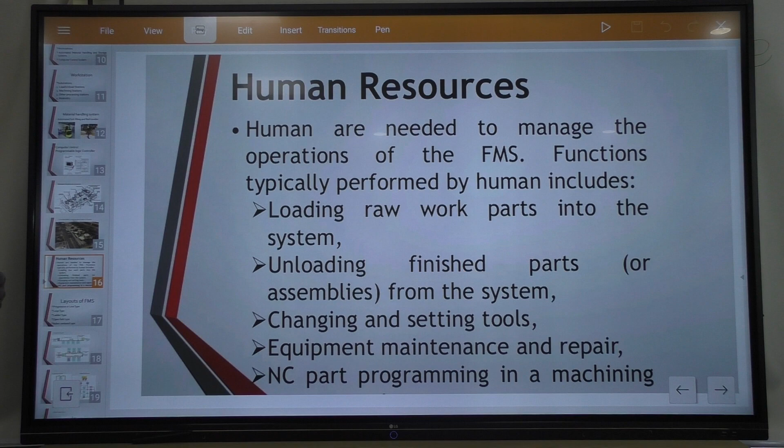Now, layout of FMS: progressive or line type, loop type, ladder type, open field type, and robot centered type. There are various types of layout used in FMS. First is line type, second is loop type, third is ladder type, then open field type, and robot centered type.

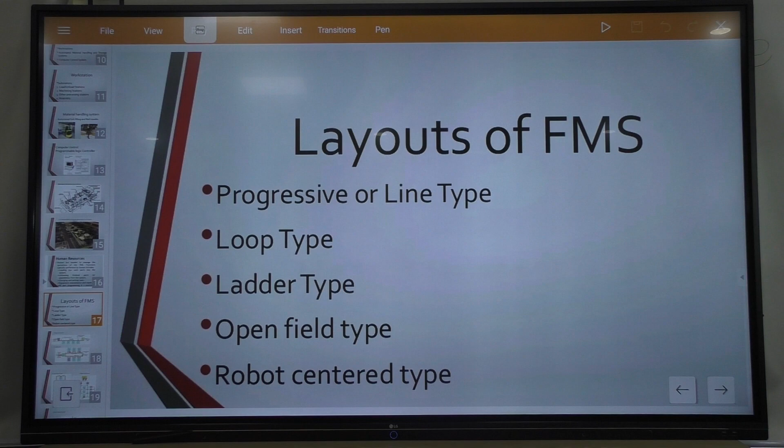Now this is the first, the progressive layout. As you see, there are automated machines 1, 2, 3, 4 along the workflow, in direct contact. If you load a workpiece, according to this flow, whatever raw material you supply to the first machine or second machine is the starting work part, and the last one is your completed part.

The red one is your partially completed work part, and this one is your parts transport system through which your raw material travels. So this is your overall progressive layout. Now the second one is your loop.

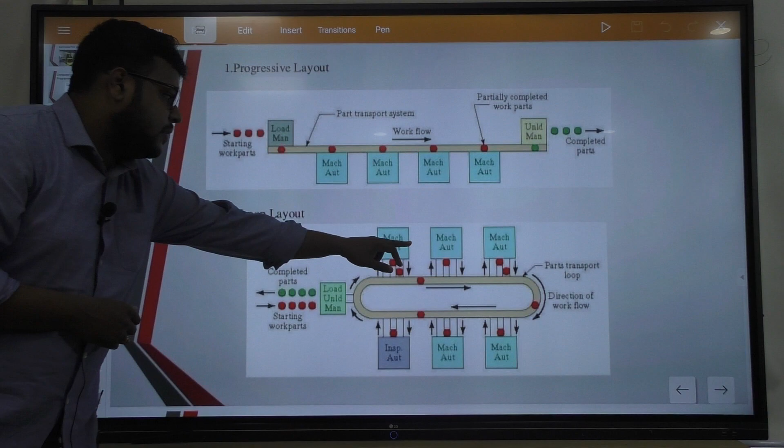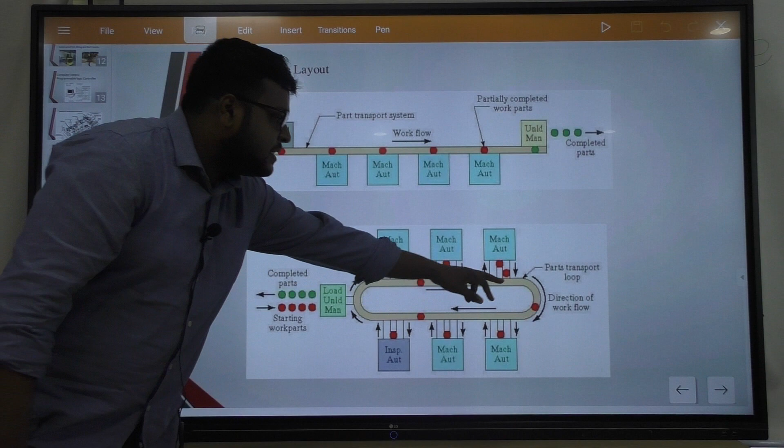Why is it called loop? Because you can see the whole system goes in a loop direction. The direction of workflow is given here, the direction in which you send the workpiece. You have to load it here. Different types of workstations are available in the station.

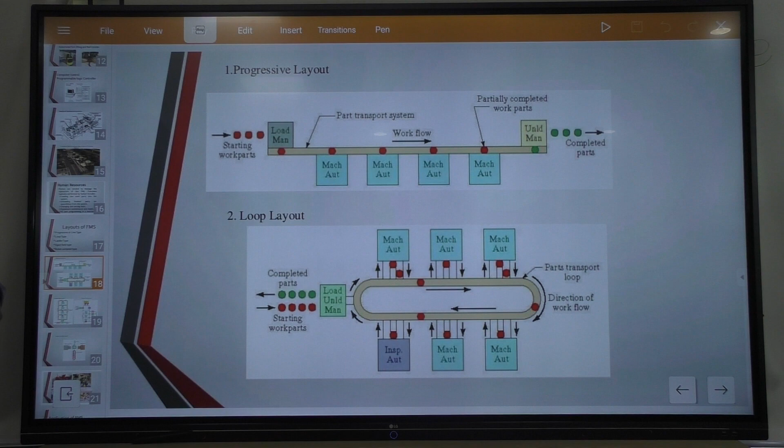The red one is your starting work part, and the green one is your completed part after the whole process has been completed. You can send it to various machines in a loop direction. Whichever machine you want to send the raw material to, it will be sent in a loop direction.

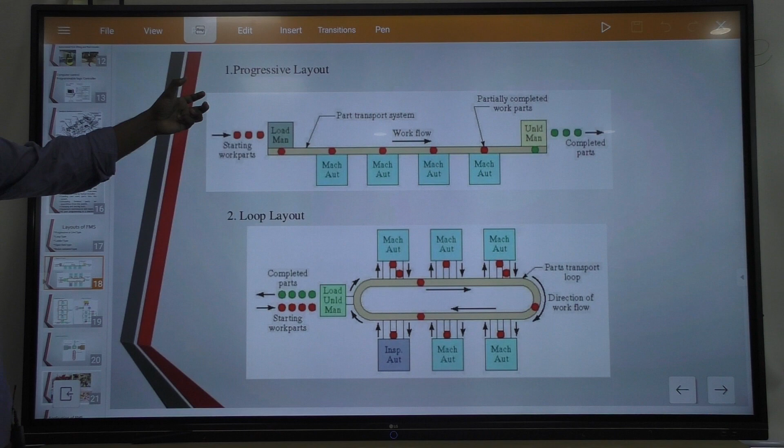In the progressive layout, it goes directly in a straight direction, but here it goes in a loop direction. The direction of flow is a loop in the loop layout.

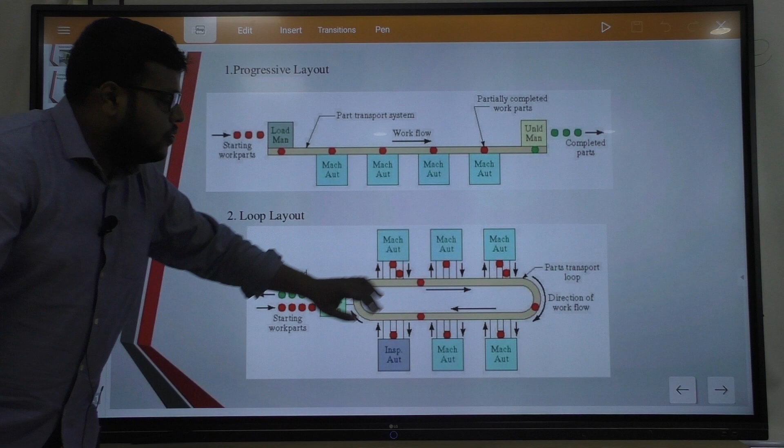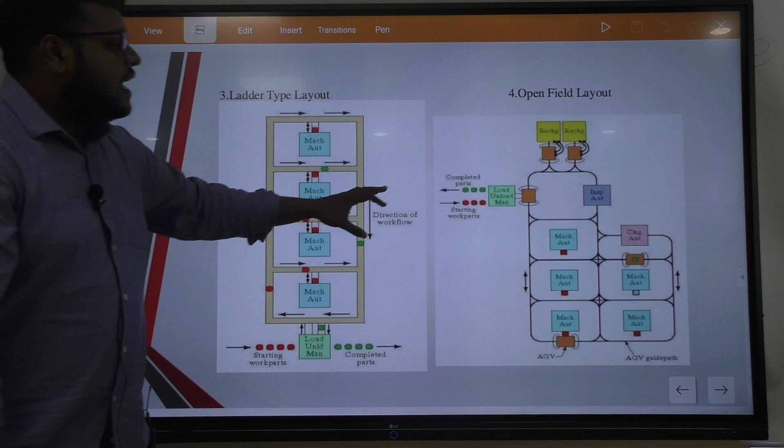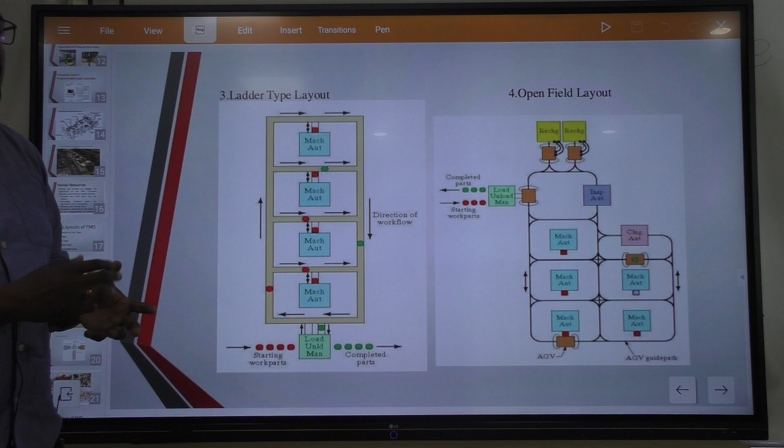Now the last one is your open field layout, this will be the fourth one. You can see the green color there, you can send the raw material in an open field, meaning you can send it directly in any direction you want. That will be an open field layout.

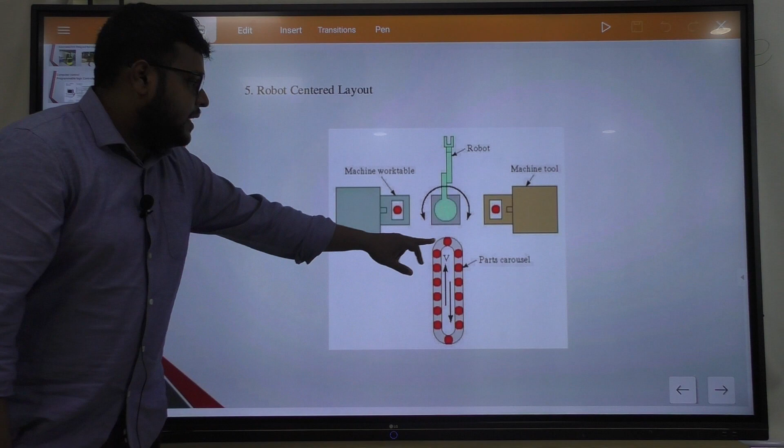Now the robot centered layout. This is your machine worktable, machine tool, this is a robot, and in any direction you can send it. So this is your robot centered layout.

Now some types of images are present. You can see in this diagram these robots are being used for loading and unloading parts from the machines, from the CNC. If you clamp some type of job in the machine, as you know, working in a CNC machine, you have to do the loading and unloading manually, which takes a lot of time. So if you clamp some type of job, it will be made possible by the help of this robot, controlled by the help of a computer. By the help of the computer you can operate this machine, and by the help of this machine you can directly load and unload the parts, which will be possible by the help of these robots. So this will be the first example.

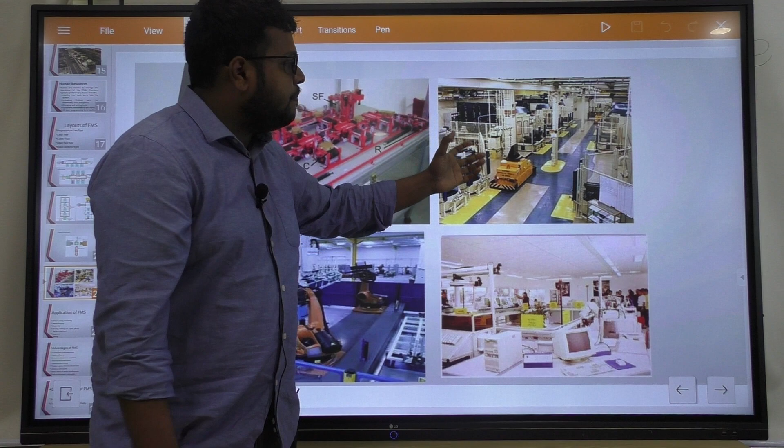In this also you can see, after the first, there are various types of machines in which you want to load the workpiece, you can do it easily. The last one, you can see, are various examples.

Now the last one is the application of FMS. Why are we using this flexible manufacturing system? First, metal cutting machining is possible here. Metal forming is also possible. Assembly, meaning the whole completed product has been completed, you can do the assembly part also. Joining, welding like arc, spot, and gluing, that will also be possible here.

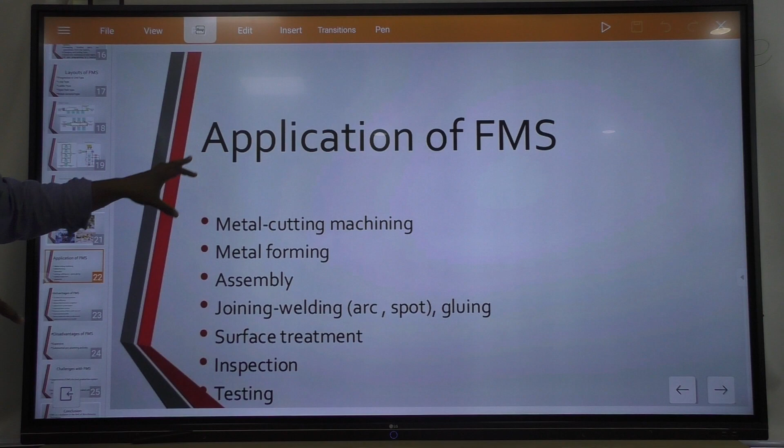The fifth one is your surface treatment. After the whole process or assembly has been completed, you can do the surface treatment here. The last one is inspection and testing. So once the whole job has been completed, you want to send it to the inspection department, which will be possible by the help of this flexible manufacturing system. And last is testing, whether your job has been done properly or not, you can do the testing operation. So these are all the applications for which we use this FMS.

Now, what are the advantages? To reduce setup and queue time, by the help of this FMS we will not go to different machines individually, which helps us reduce the setup and queue time. It also improves efficiency, because instead of going to individual machines, we can send parts directly to the respective machines, which will improve our efficiency.

The third advantage is reduced time for product completion. If I go to individual machines manually to complete the product, it will take a lot of time. But with the help of this flexible manufacturing system, the work becomes much easier and faster.

The fourth advantage is that it utilizes human workers better. With the help of computers or various software we use to operate machines, we can utilize our work better.

Next is improved product routing, producing a variety of items under one roof. So whatever tool I want, I don't have to search for it in various places. I can directly call that tool, whether raw material or any part, with the help of this flexible manufacturing system. All things are available under one roof.

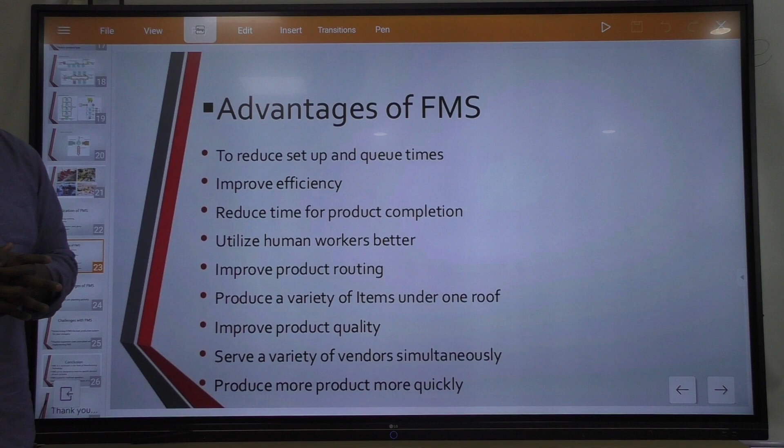Improved product quality: your product quality improves because you don't have to do a lot of work searching for tools and workpieces. It will directly clamp, making the entire process easier.

It serves a variety of vendors simultaneously, and the last advantage is that it produces more product more quickly, in a quicker manner.

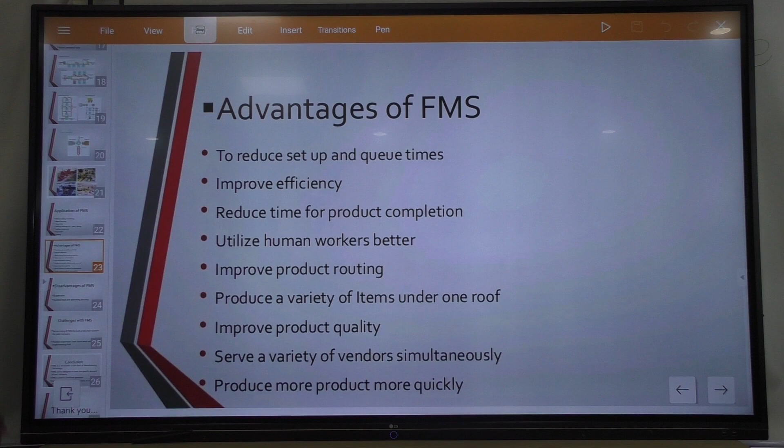Now the disadvantages of FMS: it will be expensive. Whenever you want to implement FMS, it will make the cost expensive.

The last disadvantage is substantial pre-planning activity. You have to arrange everything in one place, then do sequential planning - first facing, drilling, grinding, whichever operation you need. You have to plan for that before using this FMS, and that becomes a disadvantage.